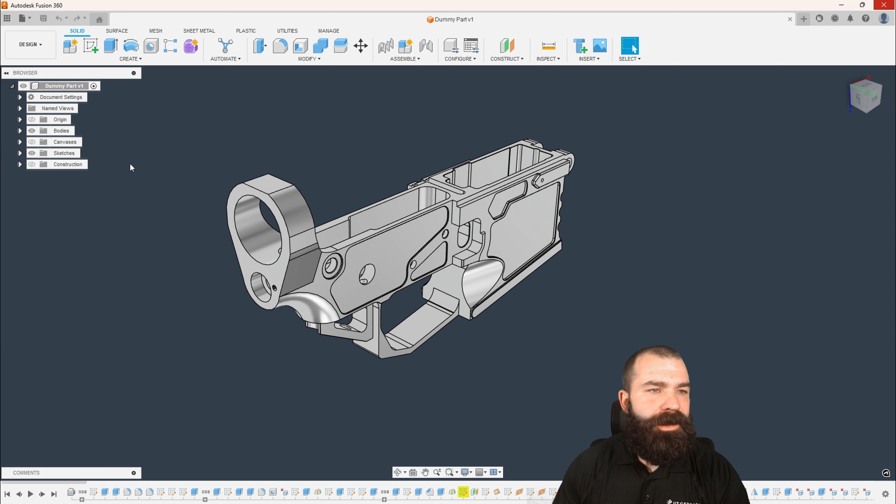The first thing I'm going to do is I'm in the design workspace. I'm going to create a new component, and this is actually going to be my fourth axis jig. The reason for that is so we can track everything under one component, making our life a little easier. Now, I am going to make this in two pieces, and the idea is we're going to run a bolt through this actual trigger area to hold it on our machine.

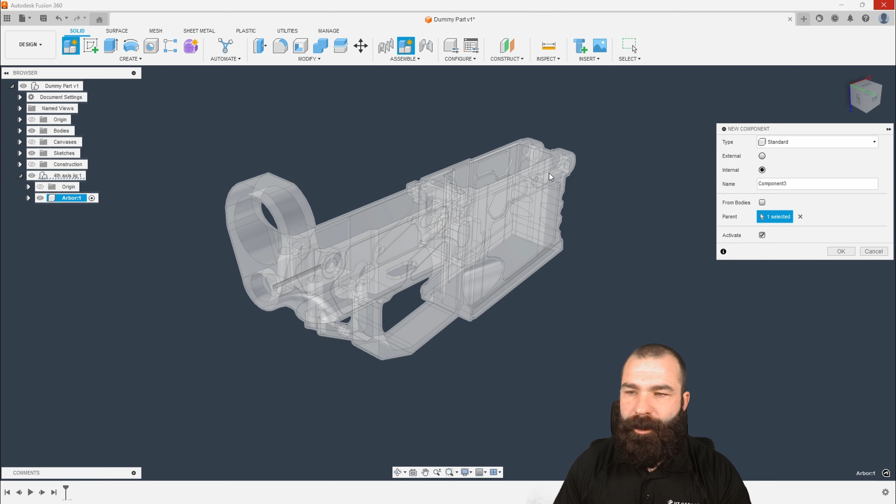So let's go ahead and create another component, again just making our design much easier. This will be the Arbor. And then what I'm going to do is create one more just to get ahead of the curve. We want to file this under the fourth axis jig, and this will just be the plate.

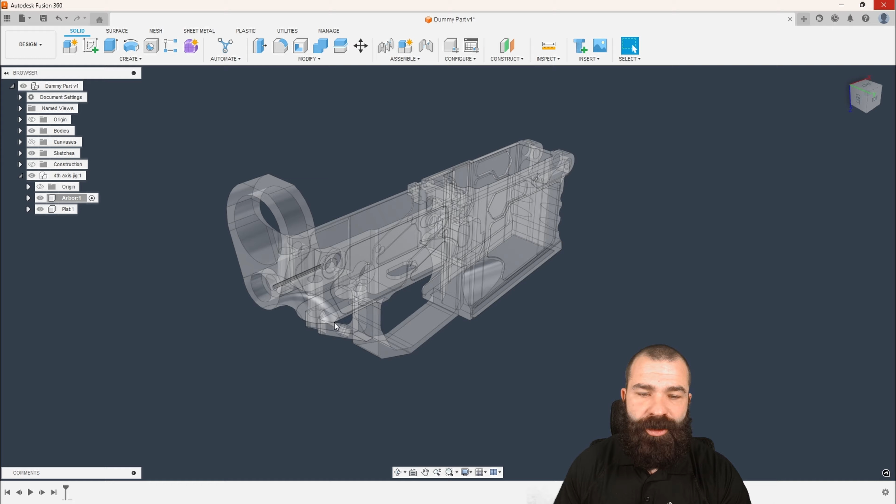Now that we've done that, I'm going to start with the Arbor. It tends to be easier in my opinion, but you need to come up with a design that's specific to what you're going to do. I'm going to do this with a couple of really nifty quick tricks, starting by sketching right here on this profile.

In my case, maybe I have some round stock that I want to work off of. So I'm going to drop just a couple of very simple circles. Now, I don't know on your fourth axis the way you plan to hold this or how you're going to fixture it. I'm going to treat it as maybe I have a Haas HA5C with a 1-inch through kind of spindle area on those 5C collets.

As you can see, I can actually do quite a bit here. So let's say, for example, my stock was actually 2 inches around - it's too small to fit, so I may want to look for something bigger. Again, we could actually do a rectangle here as well.

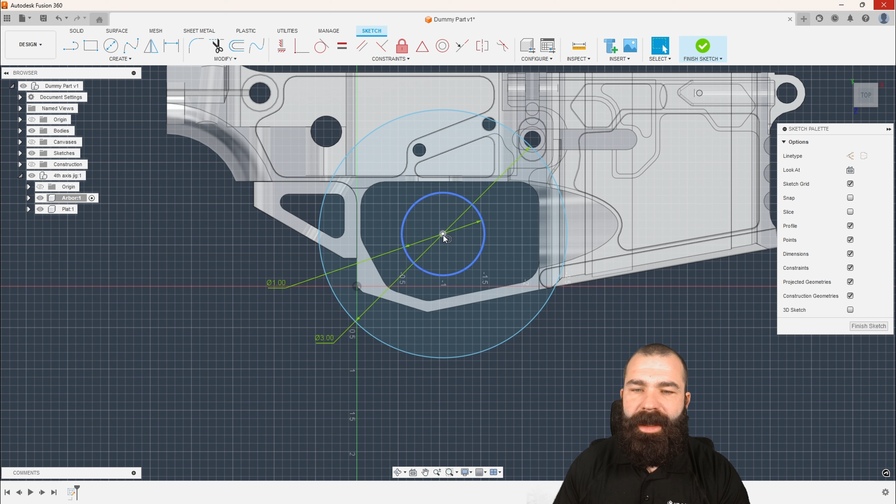The idea is I would like to get this where I can get a good hold on some of these flat areas to pinch together, but then use this profile inside the actual trigger area almost like a cog to spin my part and to keep it constantly clocked. So I'm actually pretty happy with this design that we have sketched out here.

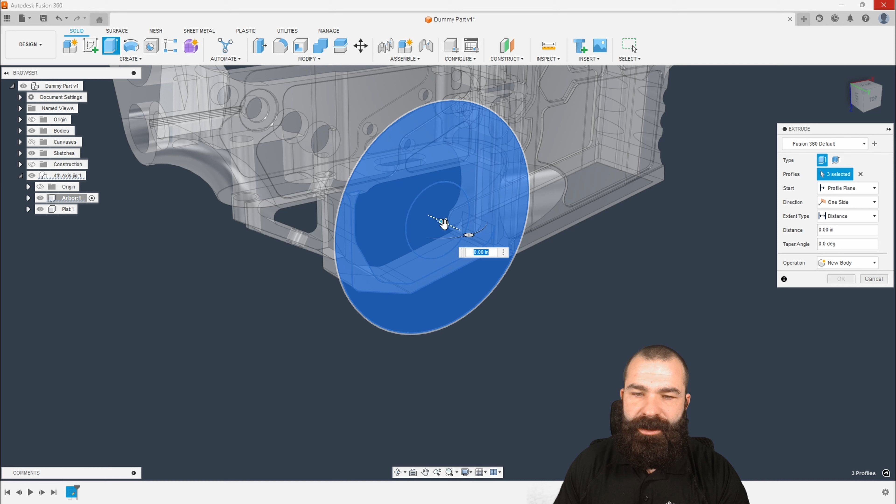So what I'm now going to do is actually extrude everything. I'm going to go ahead and bring this out maybe 375. Again, I'm going to turn that sketch back on, and the idea now is we're going to do another extrude.

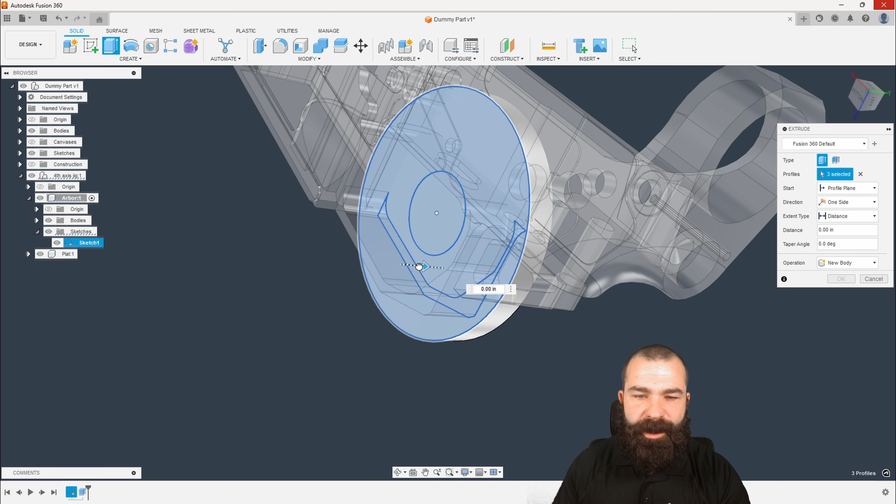This extrude on the backside is actually going to go back the other way. The idea here is we want this to actually protrude - and this is my opinion on it - I want this to protrude almost all the way to the other side. The idea behind that is so we can get as much material in that trigger well as possible for alignment purposes.

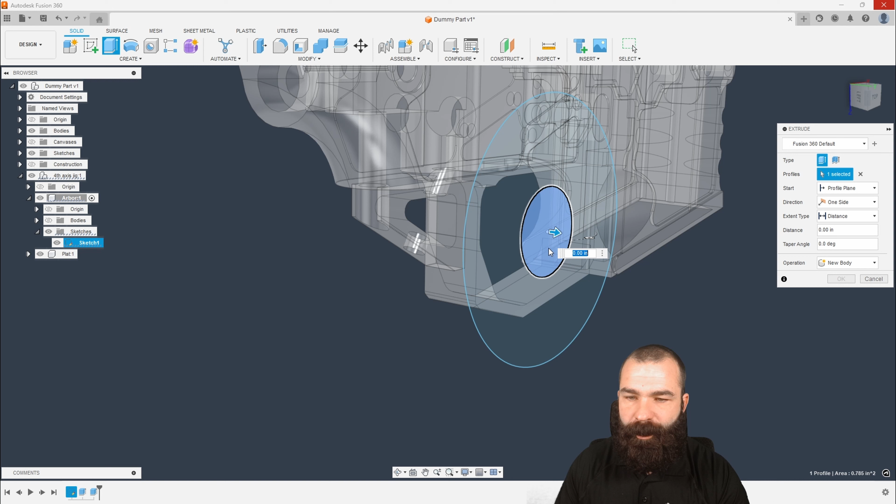Now, again, I'm going to do another extrude. This final extrude here, we're going to get that body out of the way. We're going to go ahead and extend that Arbor kind of center area. And if I turn my sketch back on and my body, we want to go ahead and join these two together.

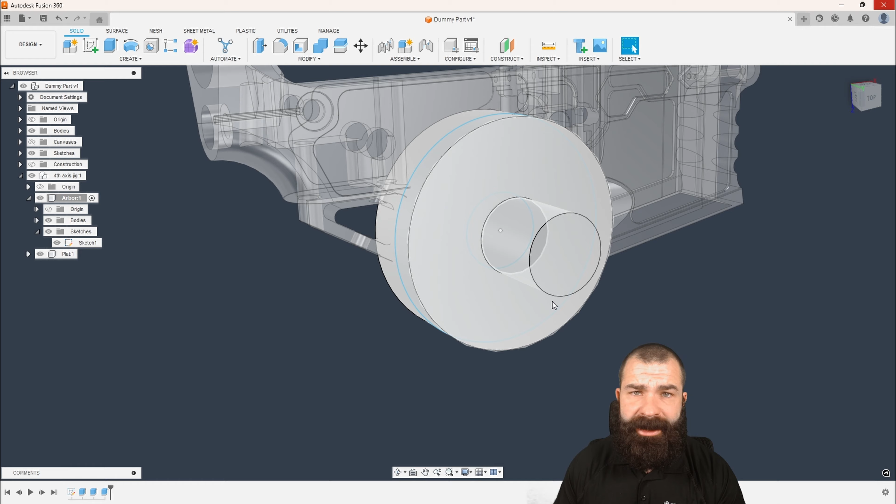So as you're seeing, these dimensions we can clean up after the fact, but all I've really done is positioned that profile I want to use. Again, I'm using a piece of round stock because it might just be something I have laying around, but I'm creating a physical body that we're going to now combine and cut away from.

So with my combine command, we're going to go ahead and target this body. My tool body is going to be actually this part here. And what we want to do is cut, and of course we want to keep the tool - this is very important.

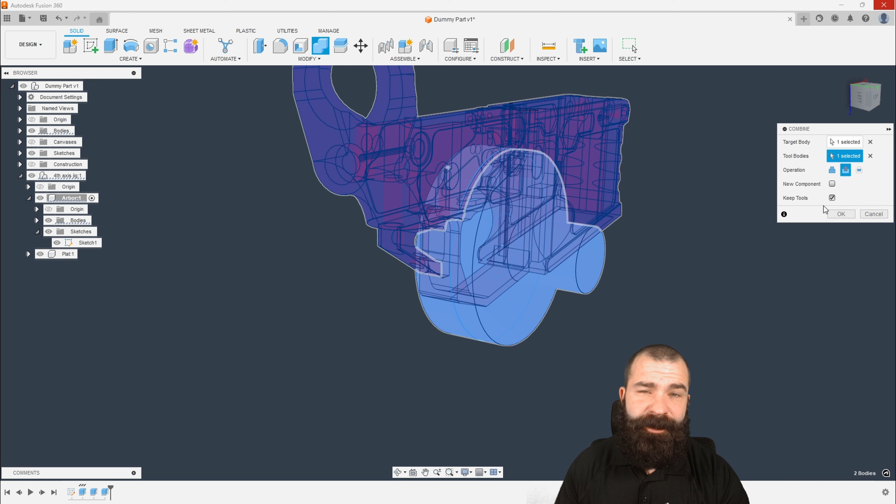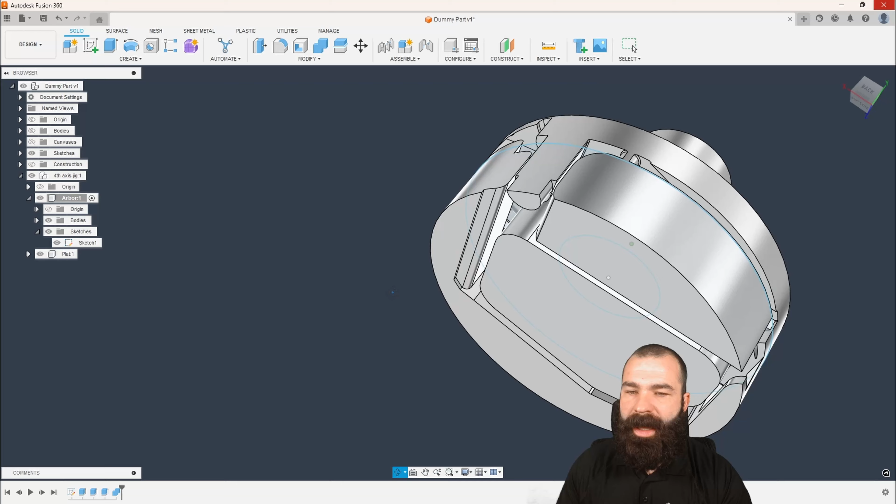So you do want to still keep the original part you guys are working on. What you're going to see happen is if I turn off my original part, I now basically have a negative profile of everything we were just working on. So the trick is we need to go through and clean this up any way possible so we can hold on to this part and make it so we can slide that part in and out.

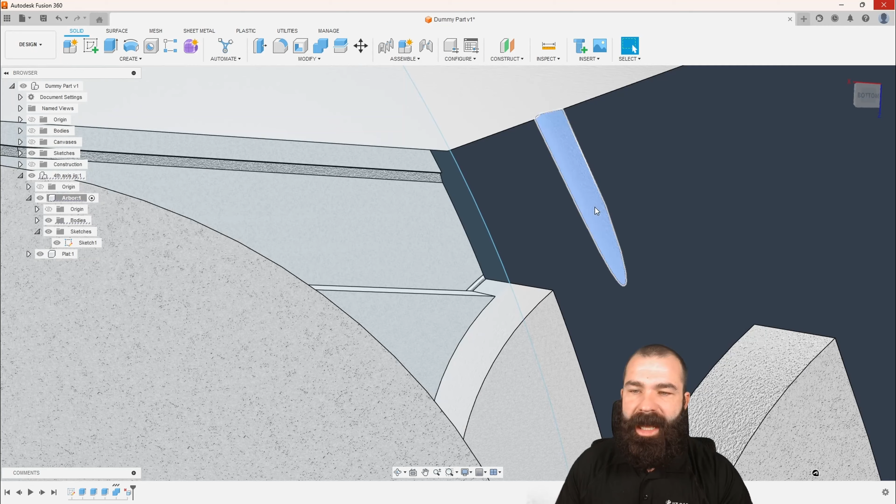The first couple of things I'm going to do at a very easy level is use the control key and grab some of these profiles here. I'm just going to use my delete key, and as you can see, I'm able to actually start to eliminate things that I may or may not want.

Now keep in mind here, guys, as you start to do this, you are going to want to turn that sketch off because it's going to get in your way. But the more you do this, you're going to get to a point where you notice you have some weird chamfers, things like that.

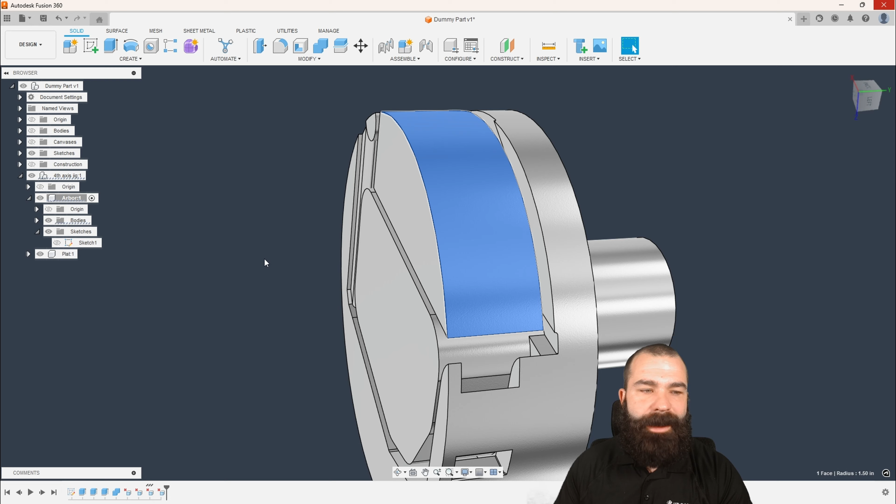But now that we've separated this, we should hypothetically have two bodies here. So again, I'm going to turn off that body to get it out of the way and continue with this process.

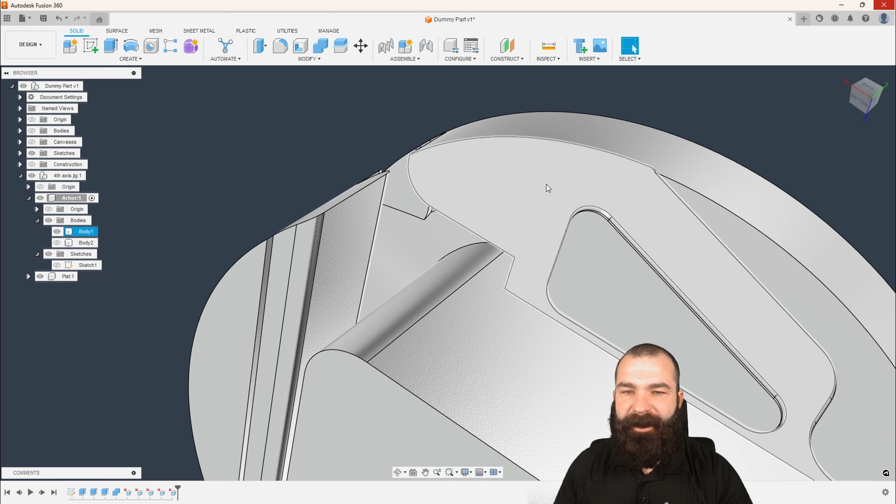A key thing for you all to remember is you want to go through and remove your fillets and chamfers first. This tends to really help the process. So if I get rid of that, see how it removed the entire feature for me, making my life much easier on this part and profile.

I'm going to go down and around here and see if we can grab all of this in one shot. Sometimes you can, sometimes you can't - you may have to select more or less. But let's go ahead and get positioned here.

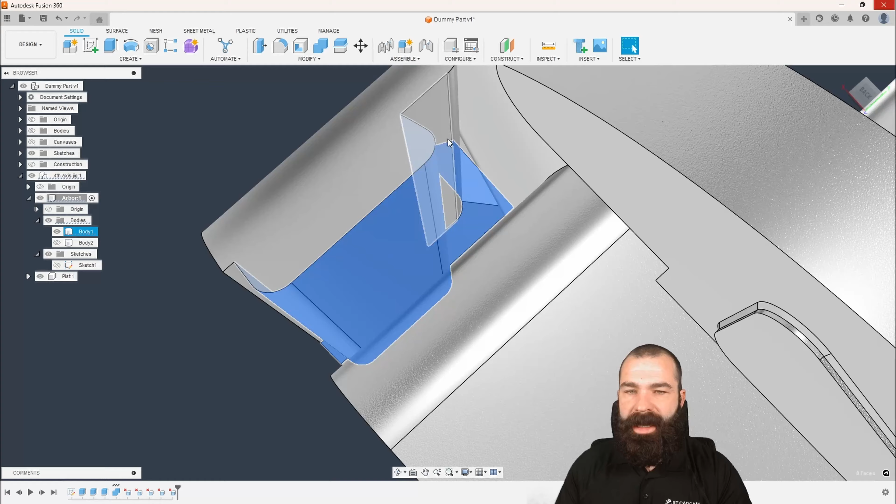I'm going to go ahead and hit my delete key, and as you can see, I can basically remove anything and everything with that delete key very quick and easy with a couple of face selections. We just start to rinse and repeat everything we're doing here.

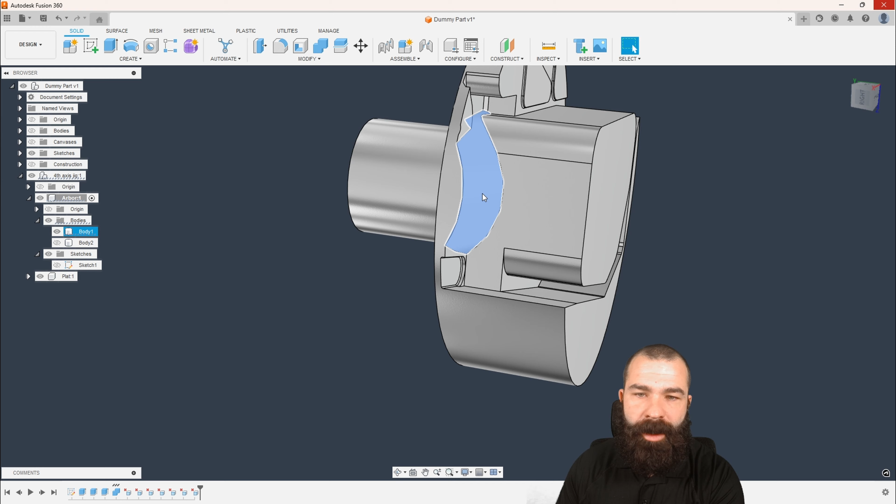So this feature right here, I may not want that on my actual Arbor. So again, as I selected and deleted, you're noticing it's starting to actually remove more and more. But if I turn on my original body, this is where we can see where we're holding on, where we're sitting flat.

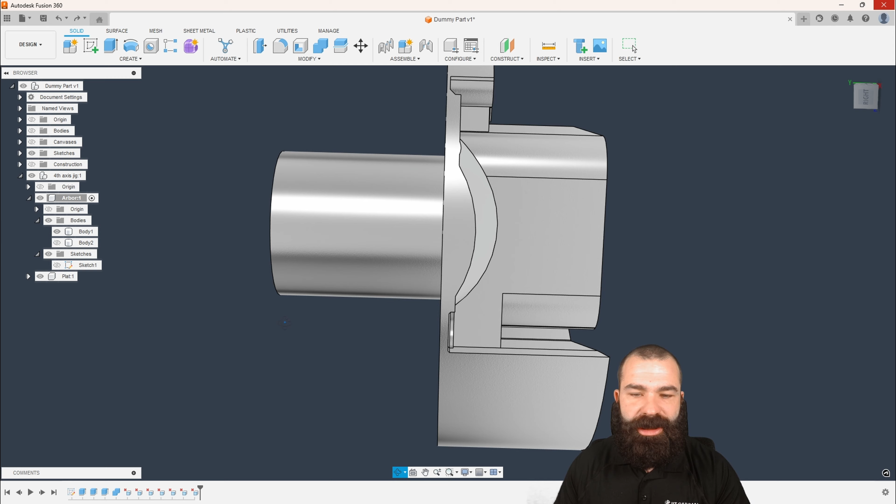So maybe that was being removed way too much. If I'm trying to sit flat against this surface, we could actually use Control Z to back that up a little bit. This is just something you guys are going to have to do time and time again inside the software.

So if I'm looking to sit flat there, I may want to remove just this piece - notice how that opened all of that up. I don't want anything down here on the bottom, so I can go through and select that and hit delete also.

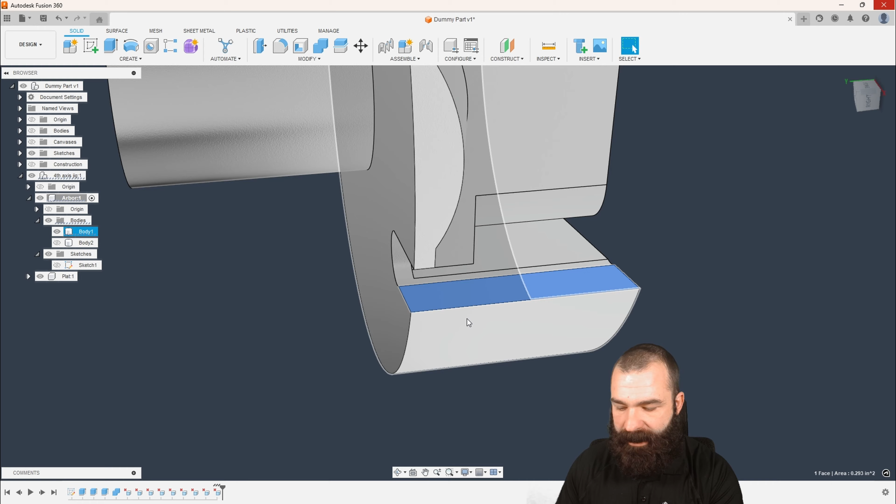And there you're starting to see that error where we can only achieve so much with what we're trying to do. We'll come back to this in a moment and fix that some more. But I'm just going to continue with the idea of opening up and getting anything and everything out of the way if I can.

So as you're seeing me struggle here with my scroll wheel, this is a good time to have a space mouse if you have one, or a 3Dconnexion mouse.

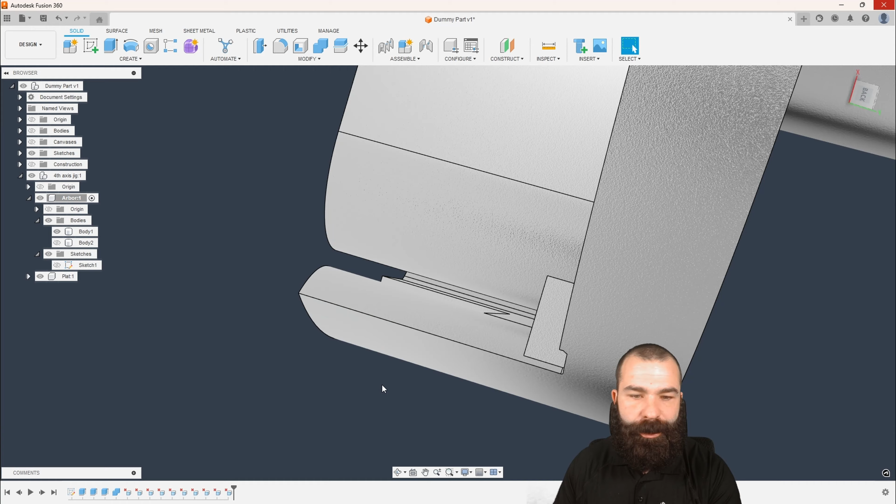Based on our deletion there, notice how that whole piece actually combined - it didn't remove it, well it did remove it, it actually filled it in. So I'm going to have to go through, select a couple of faces, and hit delete. I'm going to keep working through this little by little to get stuff out of the way.

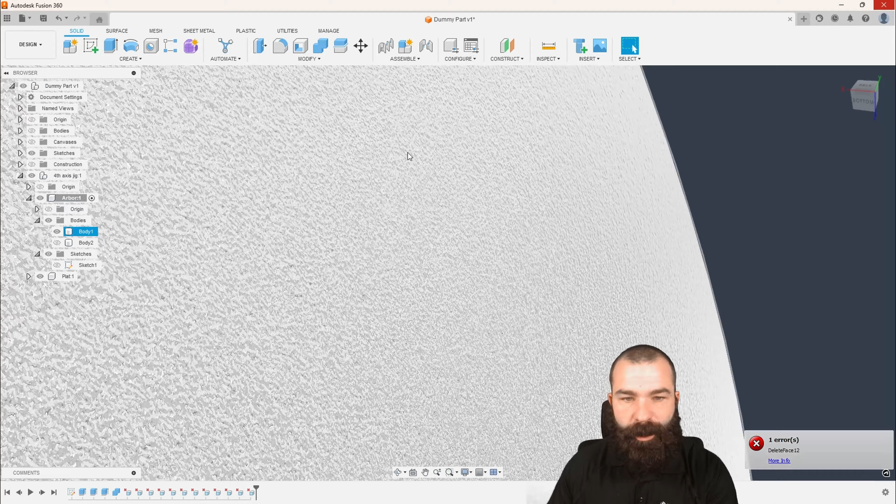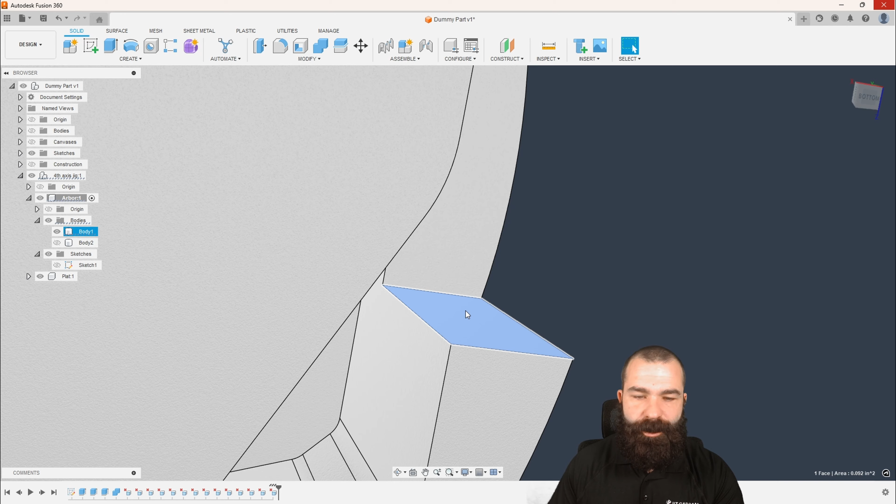Looks like we do have a little bit of a weird feature that came through here. From that, you'll notice it's not really difficult to clean this all up and get it to a point where you could use it as that jig for what you want to use. As you're seeing me do, I'm approaching this a couple of times where maybe I remove smaller features, or I have to remove stuff one at a time to get it out of the way. But once I get it back to a profile that I may or may not want, I can just highlight faces and hit delete.

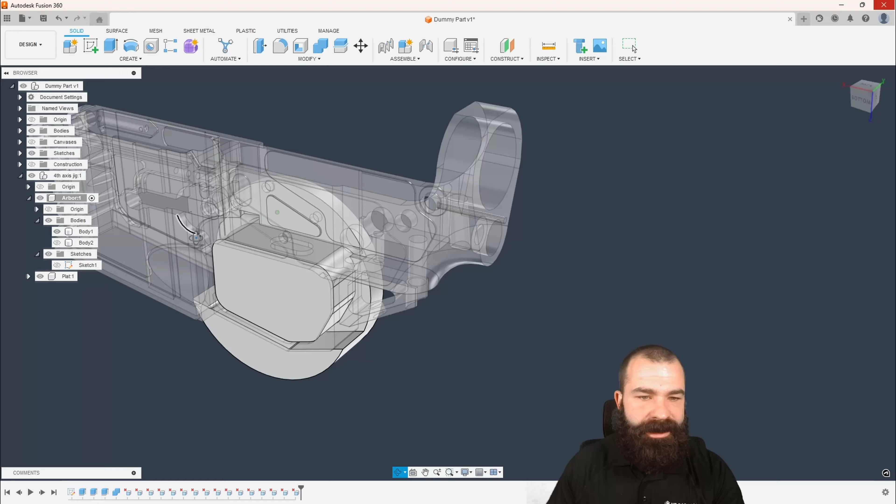I'm actually starting to like this more and more. We can turn on our original body. As you're seeing, it is now sitting in there very well. We are still making tons of contact in the flats. Down here at the bottom, this would be up to you, but I'm actually going to remove this bottom area, knowing I have to get in and machine stuff here.

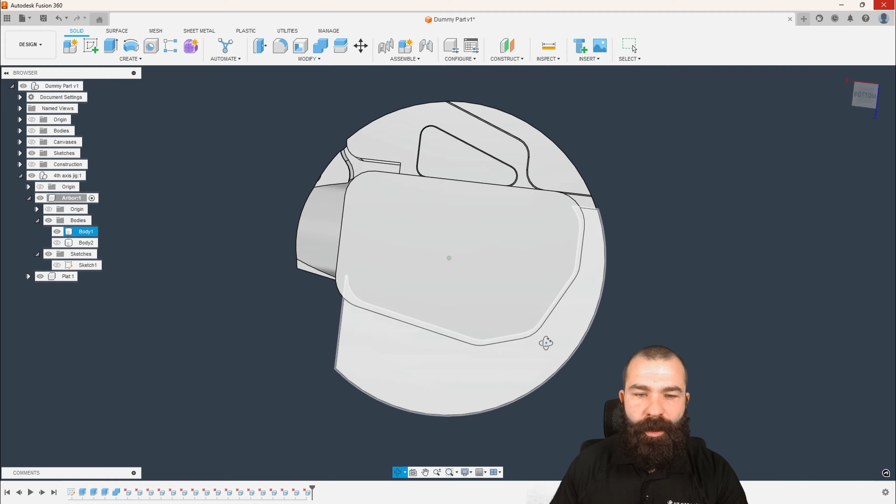So let's go ahead and move back over to that. Grabbing basically this whole lower profile, we might get lucky hitting that delete key. And just like that, that whole lower profile is gone once again. We do have to always pay attention here because we want to make sure that we're not actually still making contact. We could do another combine here in a minute to check. But as you do this more and more, you're going to find all the little tips and tricks on what you can and cannot remove with delete.

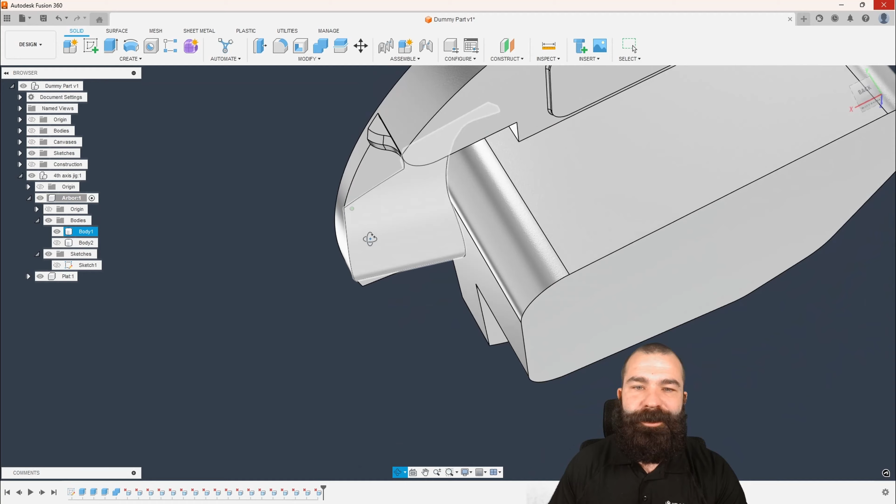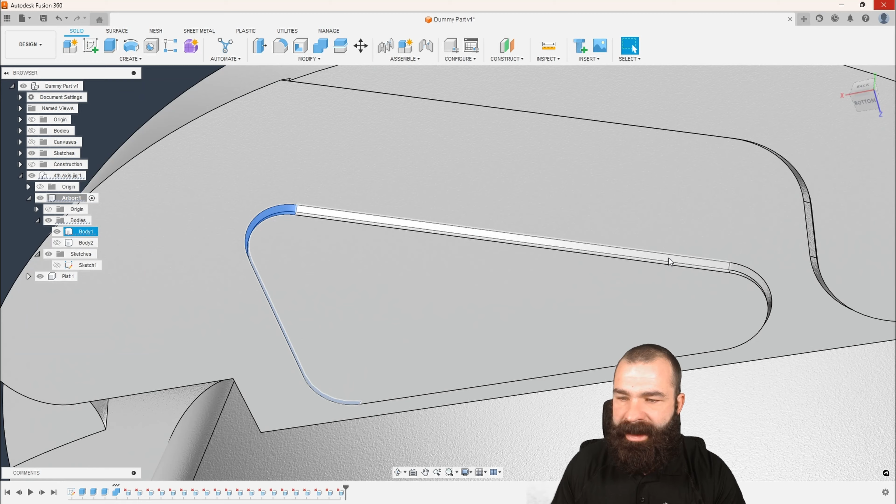Again, based off our design, we don't need a chamfer down in here. That could actually stay very square. That's just being able to fast come in, use the delete key to remove anything and everything you don't want. As you're seeing me do here, I'm going to go ahead and remove this island because we don't need the actual island to mate up to our actual physical part. I'm just holding control, using my delete key to get it out of the way.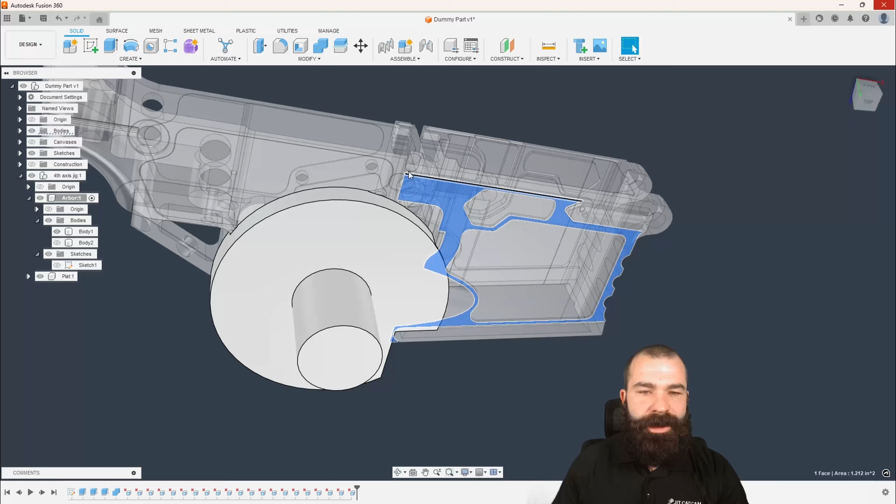Toggle back on my part. As you're seeing that little cutout there, we're actually going to be sitting mainly flat against a couple of these faces. So it looks like we're going to be holding on to this face and this face for the most part, and those are the main elements I'm using to actually sandwich against on this profile. So we have that inside trigger area to create our clocking off of, but then we also have this outside flat area that we're pinching against. You can add as much or as little as you want to this.

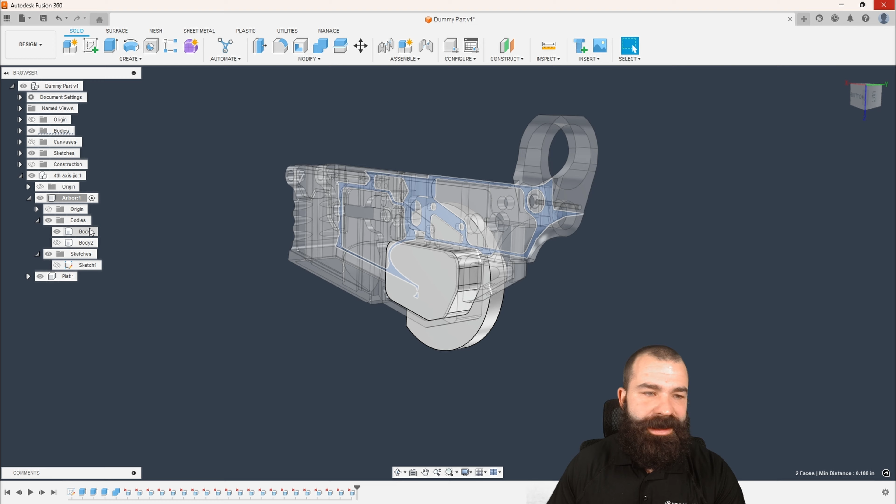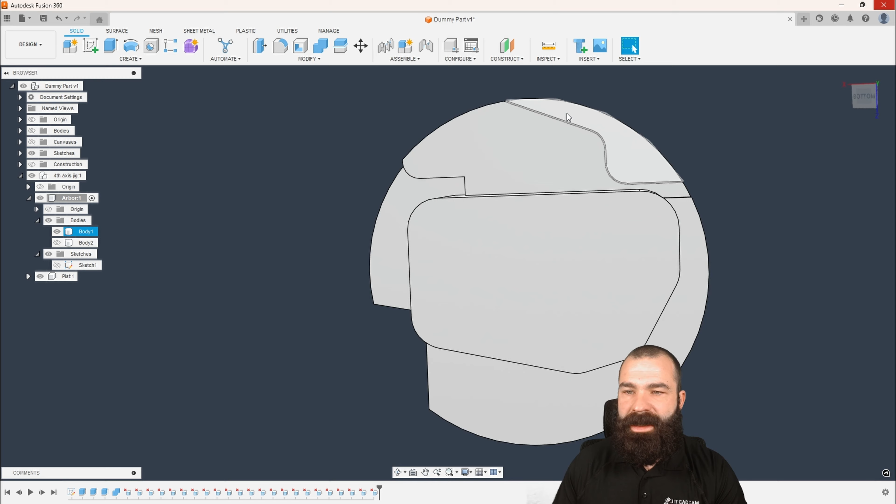So if you guys wanted to, you could actually just eliminate this whole top area if you want. We're going to go ahead and attempt to get rid of that half round there. As you can see, that came out no problem. Just picking these profiles and using my delete key goes a super far way when it comes to any of this stuff. So as I know I don't need anything here, I'm going to grab all these edges. You're going to see me do this one in two parts: I'm going to remove the lower fillet first, and then I can go back and remove the actual island that's sticking up.

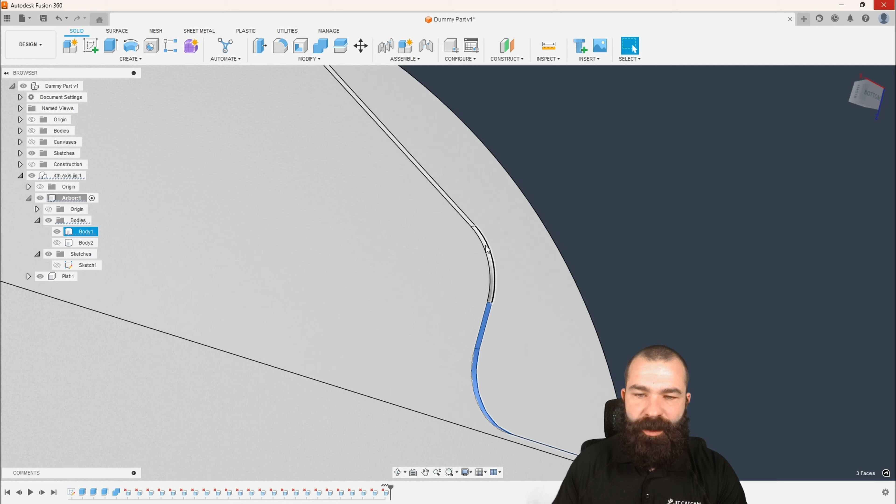So once you kind of proof out everything you want, you get it to your design. I'm going to go ahead and stop here because I don't want to bore you guys to death with just me deleting features. The concept is that we now have our arbor.

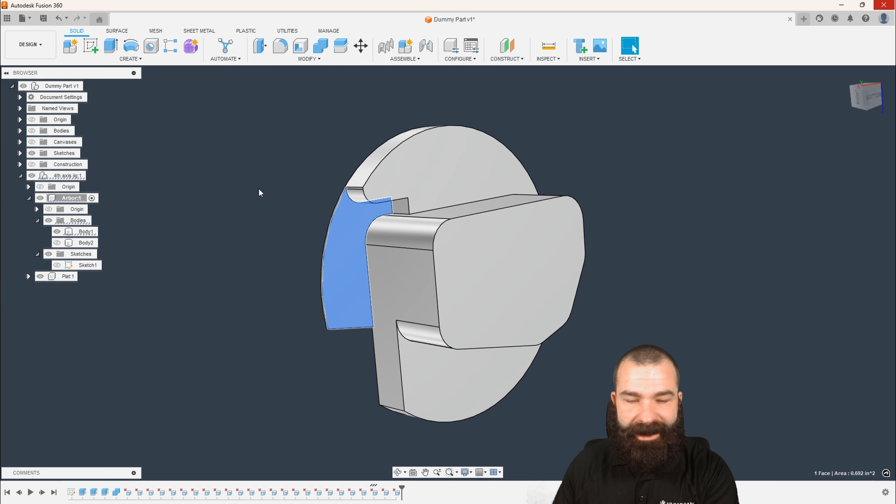Again, because of the way Fusion works in extruding, you can see we have some very thin material here that you may or may not want to keep. Up to you guys, as always. You could go ahead and just select that and delete it. You could actually go in and change our extrude dimensions, or we could even extrude off of this just as is to give that a little bit more thickness if you needed it.

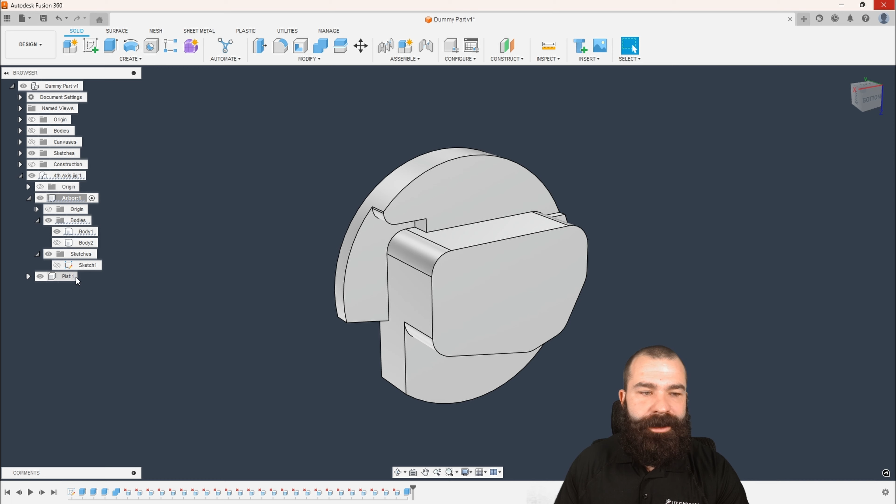But now that we have this, I do like this quite a bit. This is a very simple design. We can utilize this design now. We are going to actually create now the mating part, which is going to be the end plate on this design. That plate is now active.

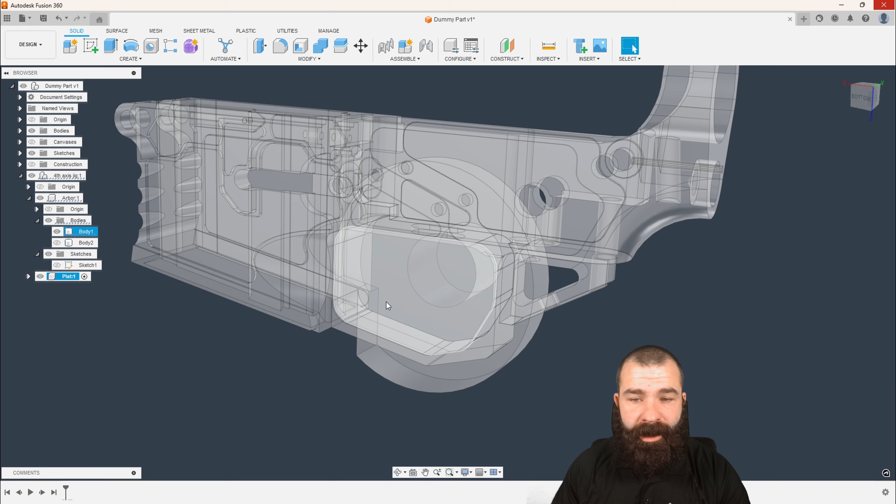So again, anything we do based on the plate, the mating plate, basically, we want to make sure that we have that active. Again, I'm going to go ahead and turn on our main part. As you can see here, here's my main part once again. If you guys wanted to, again, this is 100% up to you, we could reuse kind of the circle that we created from the other side.

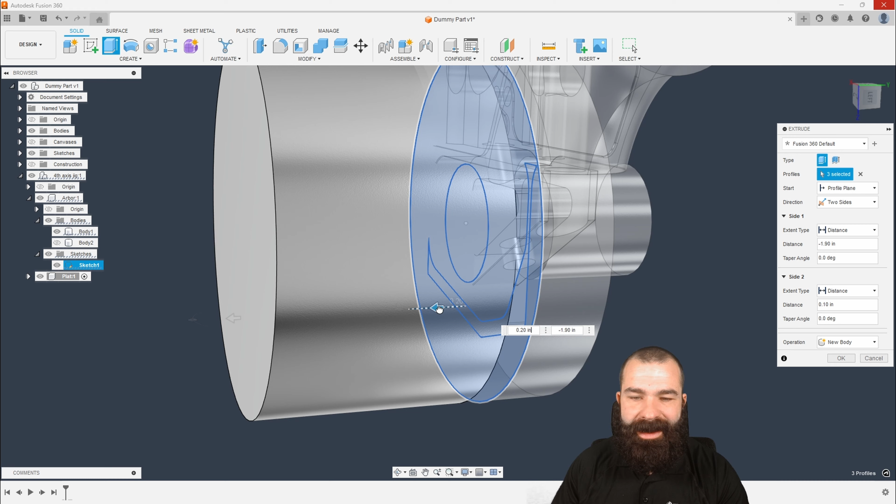This would be a good time to be able to do a two-sided extrude. So if I wanted to, I could say two-side extrude. Again, I'm going to just grab all of these profiles. And what I'm going to do is I'm going to pull this guy out. And it looks like I didn't pick two-sided. But as you're seeing here, I can now set this to anywhere and everywhere that I want.

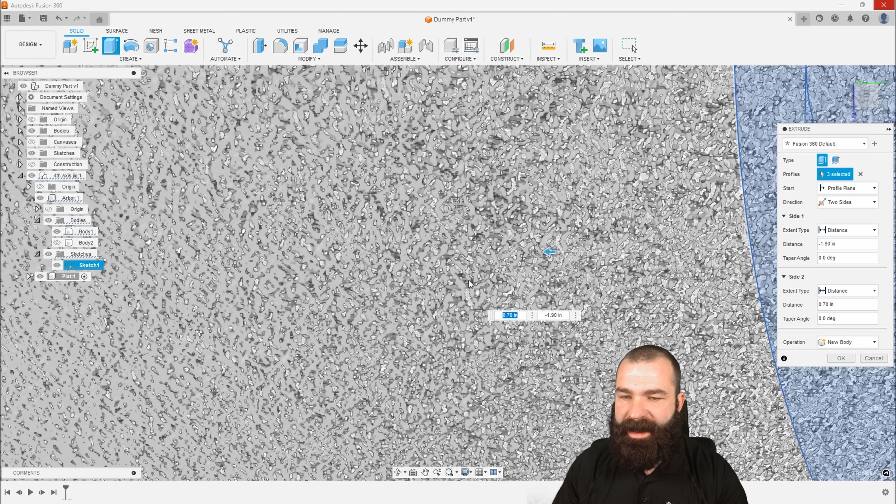So again, the idea is we need just enough to meet up against our flat here. So if I actually click that arrow and then I come in, I could actually pick the face, or I could say extrude to. Now, I want to add a little bit of a gap here. So as you can see, I'm going to go ahead and plus in an additional .05 maybe, or that might be way too much where we're not mating down flat on this side. So again, what you guys are going to do is going to be based off your design.

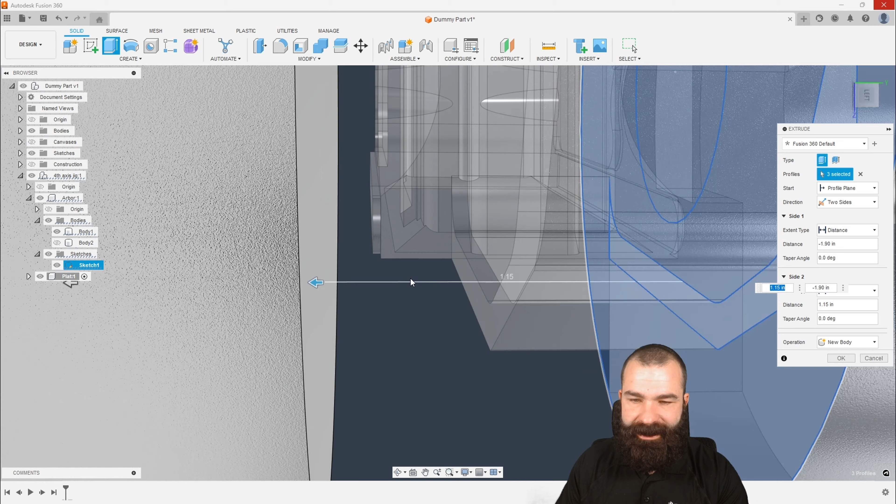As you can see, I actually screwed that up where I picked that surface. I'm going to go ahead and pull this out further and tilt us a little bit here. I want to go off the flat of my arbor, not the trigger housing. And now I can go in and I can say, you know, plus .05. And as you can see, we now have that gap between the two. Oh, we went ahead and said shift equal signs. But now we have that gap between our arbor and where that actual piece is sitting.

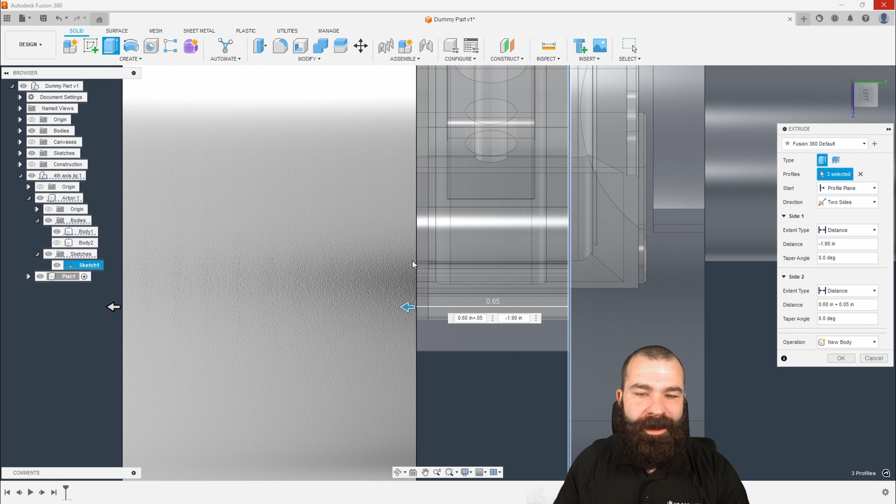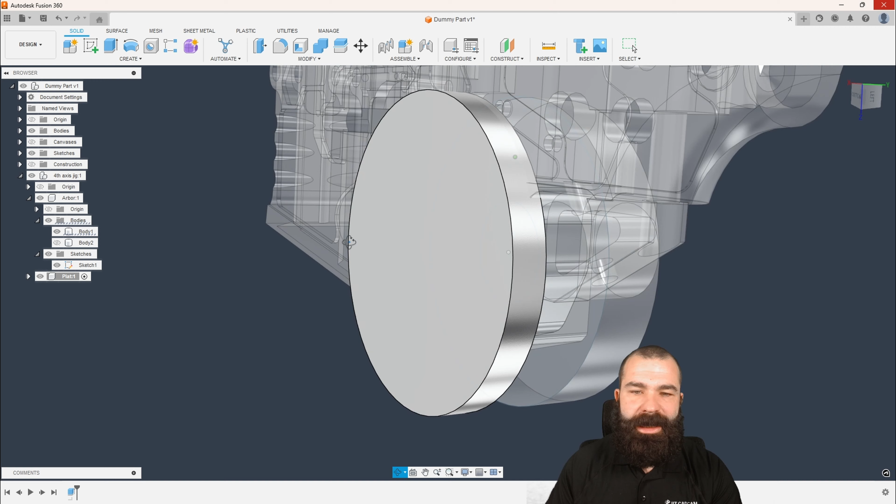Again, this is all 100% up to you. My personal opinion would be I would actually set this guy straight to the lowest flat. It'll make my life much easier. So now that we have that, we could just kind of rinse and repeat. I'm actually going to go back and not extrude that out as if it's a monstrous thick piece, but we could do our combine. Again, just walking you guys through this process.

We could combine this guy with this guy. Again, this is a cut. We want to keep that tool. And then let's go ahead and isolate this guy so we can work on it. So what's going to happen is you're going to see that I can right click and I can go to isolate. And now I can work on this model without interference from anything else.

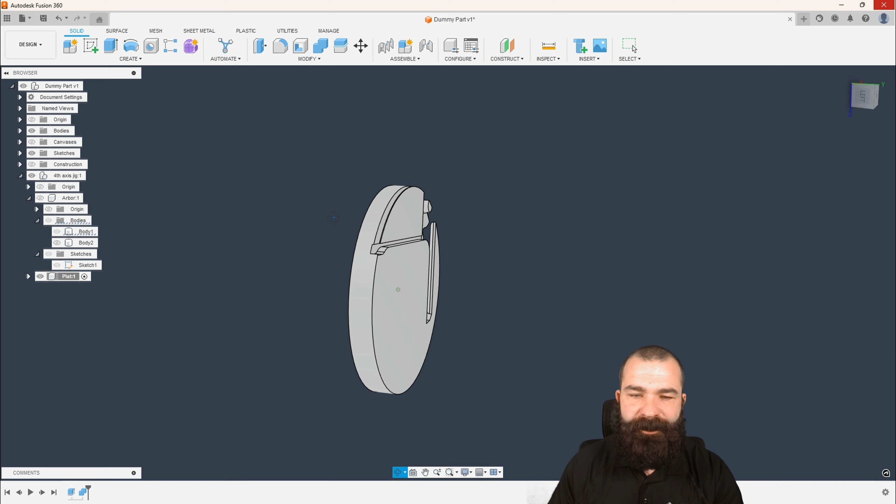So again, just going right through what we just did, we're going to go ahead and remove some of these features. As you're going to see, that now is going to possibly give us a whole other body here that I could just delete out of the way. And I'm just picking those parts and areas one at a time and hitting the delete key. So again, just using your control and your delete key, we could walk through this.

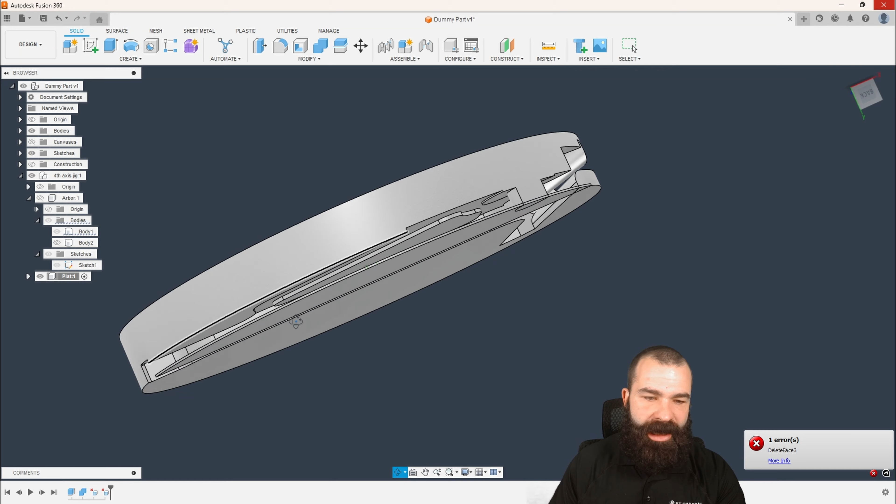In this case, we're actually getting a little interference on that part. And again, this is where you guys just have to walk through and delete things one at a time. So again, I'm going to back this up a little bit, and I'm going to start by deleting this guy if I can. And now notice by deleting that first, it now allows me to change how I'm deleting out other areas. So again, each scenario is a little different.

How you select those faces will make all the difference as well. If you are working with something that could be considered perfectly flat, or as I like to always check, make sure that it's not just a second body. In this case, it is.

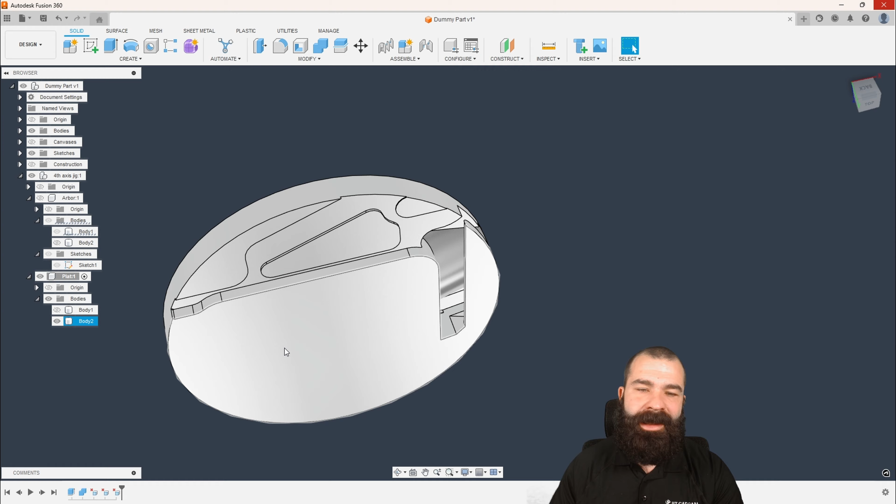You can't delete a body completely technically, and that's why we're getting that interference. But same thing applies, right? So I know I don't care about any of these little islands in here. Knowing that this part is actually relatively flat, you guys could also do things like press pulls and extrudes. So if I grab these islands and pick that flat face, again, you can notice that I can get rid of those islands just with a simple extrude.

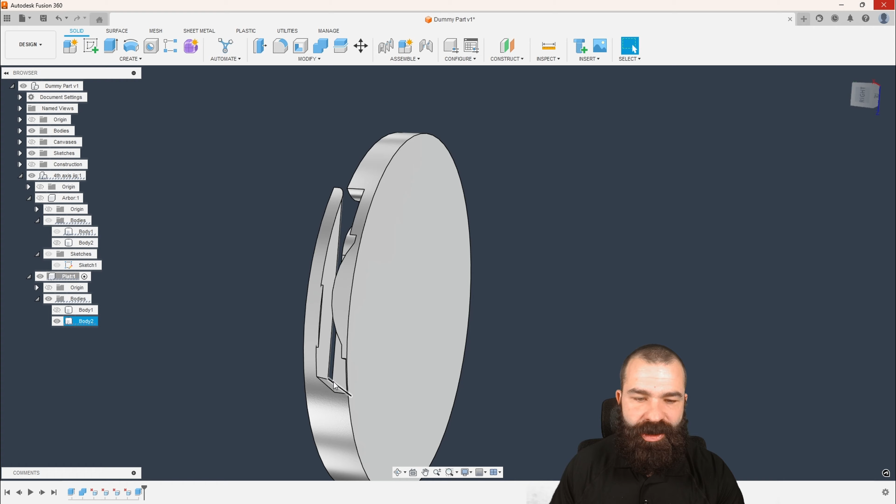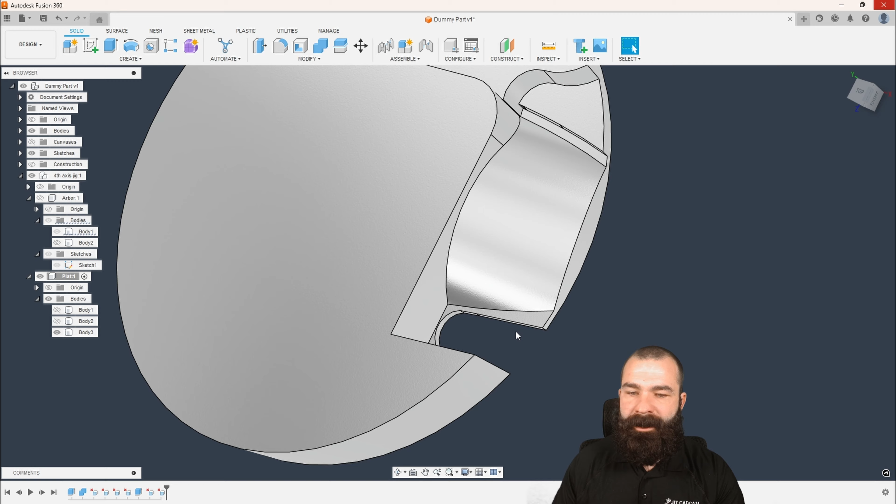So again, coming down and around here, I'm going to go ahead and select all these couple of faces here. Same thing, using my delete key, for the most part, just wiping things out as much or as little as I can to get rid of it. And sometimes, again, you create a whole extra body that's not going to be needed. So from here, as always, we can go ahead and just remove, right? That's our game plan as of right now.

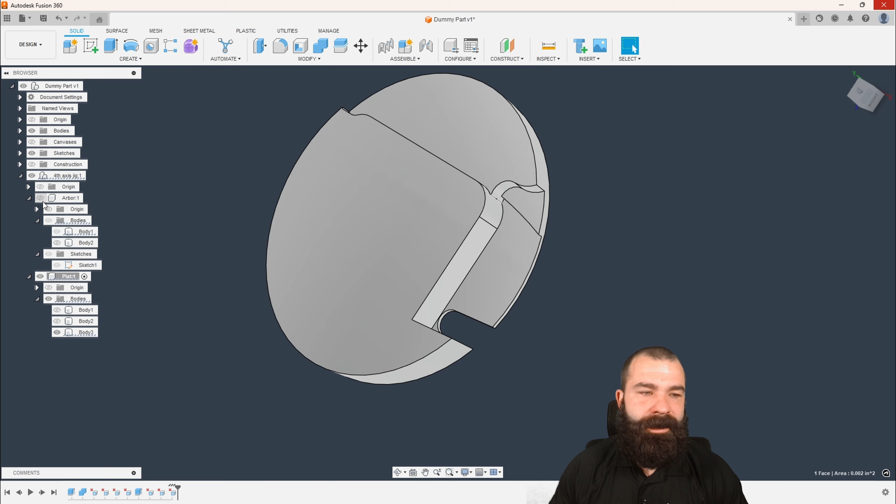We also don't want anything that could interfere with our part and how it's going to align. If there's maybe an overlap or a step, we can fix all that stuff. So now for the fun stuff. What I'm actually going to do is turn on my Arbor and my actual plate that we're going to use to mount this. Again, you guys are going to clean this model up a lot. We could create sketches all day long, extrude rectangles, things like that. But let's go ahead and actually add in our hardware.

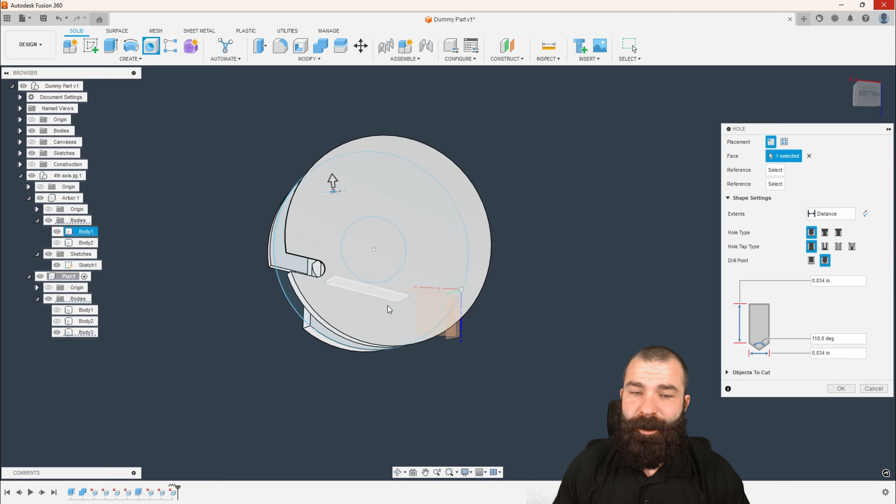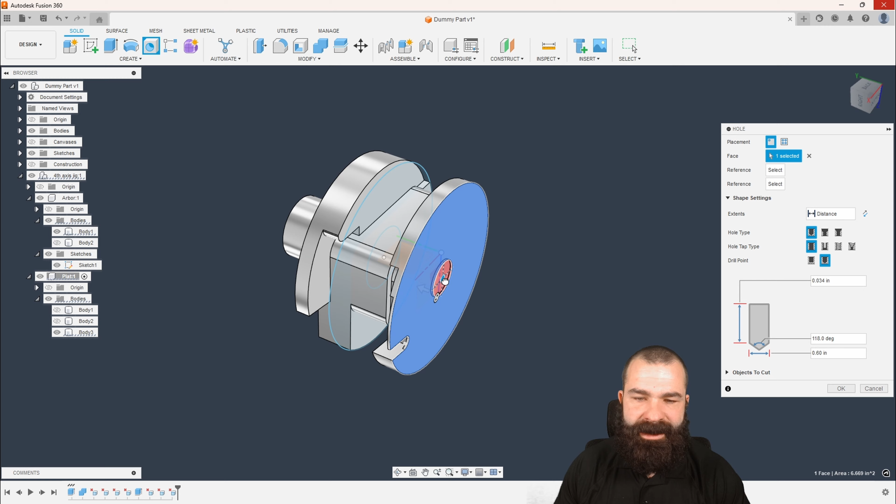So I'm going to come into Create and we're going to add a hole. And this is why I like the idea of a round face to work with: we're going to place that right on the surface that we want to work with. So as you're seeing here, we have this body here. I'm going to pick that surface to work on. So right here, I'm going to move this to center. And this is the key element: because we're working with that round face, it's automatically going to give me center of that face.

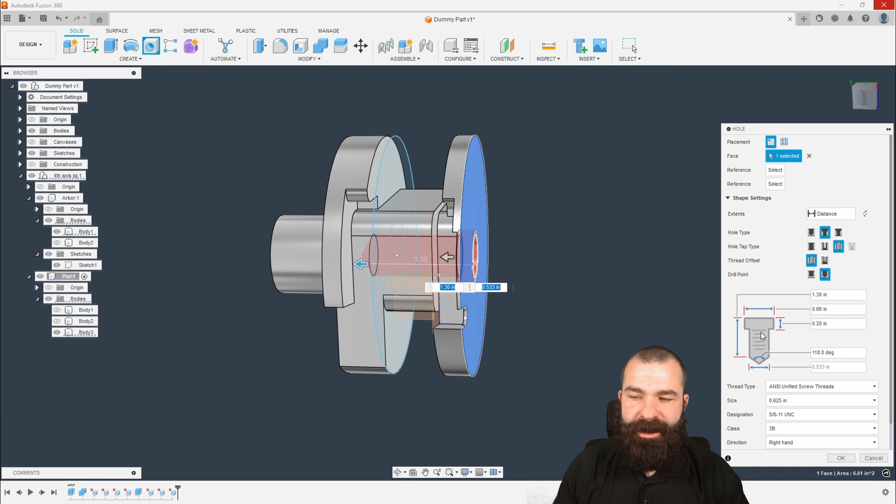Now, I just have to plug in my profile and my information. So this is going to be a counterbore. This is going to be for a clearance, possibly a flat bottom, things like that. So now we could actually set the dimensions of this hole for what we're doing. We could actually go tapped here as well, and you're going to have your upper shoulder versus your threaded area, things like that. But the concept is still the same. What we want to do is create the profile that we plan to drill and bore out to bolt our two pieces together.

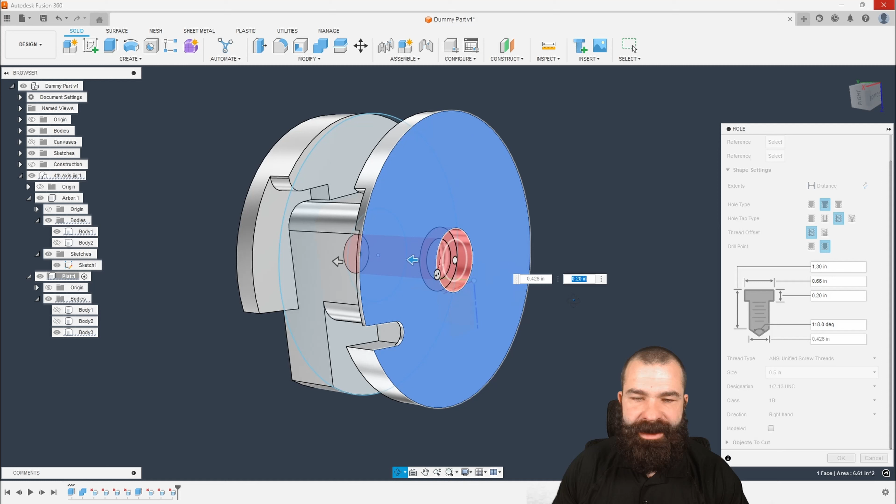So if I go through here, I'm a big fan of half-13s if we can get away with it. So we're going to go half-13. As you're seeing here, we have all that information set up inside of Fusion 360. So now we can actually build this as we're going to more or less machine it. So this is kind of a quick way to add that feature in.

Fusion does now, so you guys know, let you go up here to the top and insert a fastener. This is a super cool thing, especially with your jig and fixture design. We can go ahead and search. We just need a bolt. Maybe we want not a hex head. Let's go back real quick. We're going to go for a socket head, shouldered maybe, yada, yada, yada. Yes, no, maybe so. Everything and anything.

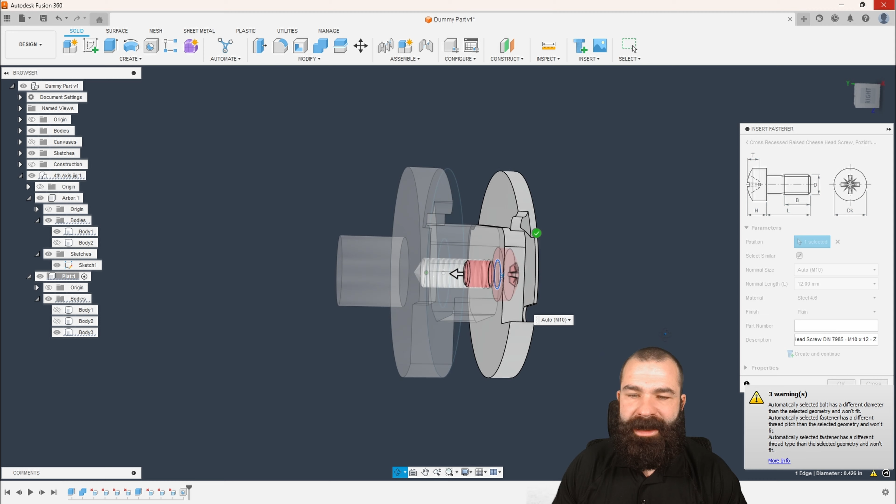It's going to be up to you guys what you want, and we could actually place that right here in real time. These specs don't line up; I'm just showing you a neat way to bring this stuff in and utilize it on your part. So now that we've designed our jig, we have our original part as well up here, and I am going to just turn everything on and get our sketch out of the way.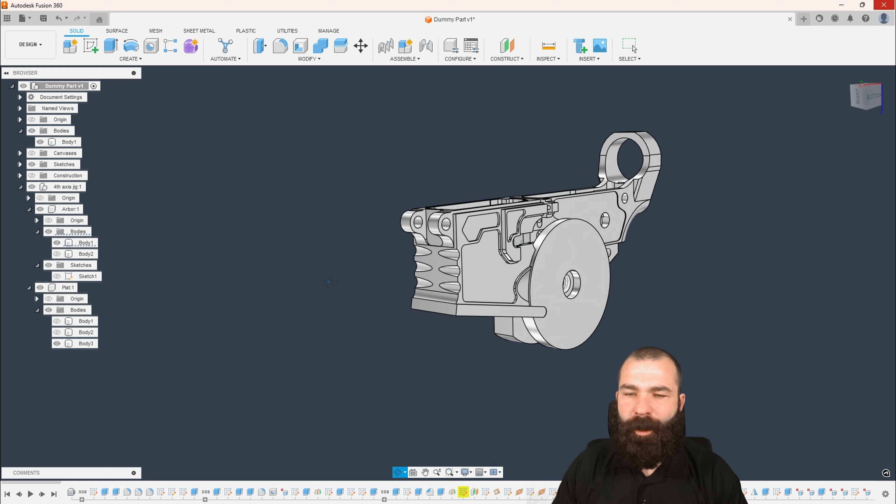You can now see how we could use this to our advantage to actually machine this part. So now that we know everything is going to rotate around center, what does the machining side of this look like? So let's say, for example, I want to do some stuff on this buffer tube. I'm going to go in and create my setup. As always, we do need to set our Z and our X.

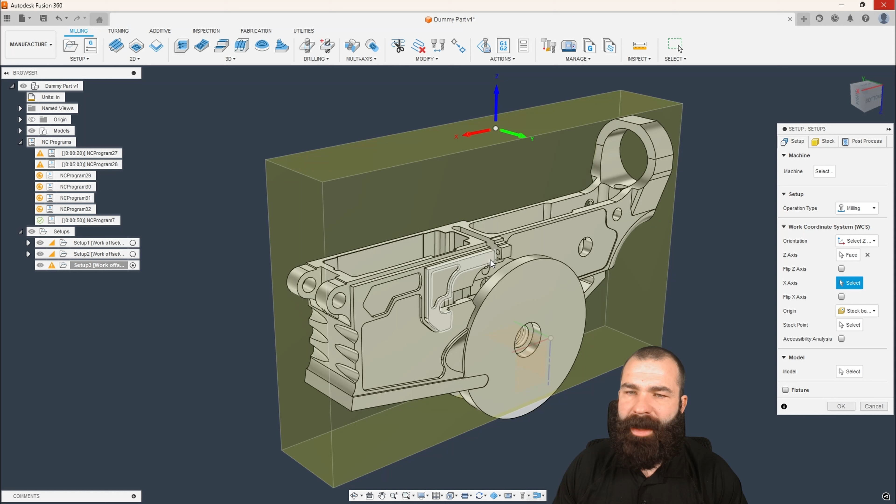And if we're using a fourth axis, our Z is probably going to be up off the flattest area, so you can dial indicate that in initially. And then my X axis is going to point towards my fourth. I actually did mine a little bit backwards here, so we're going to go ahead and spin it this way. So if you think about the machine, and we might add in a fourth axis machine here, it's going to hold on to directly center of that arbor.

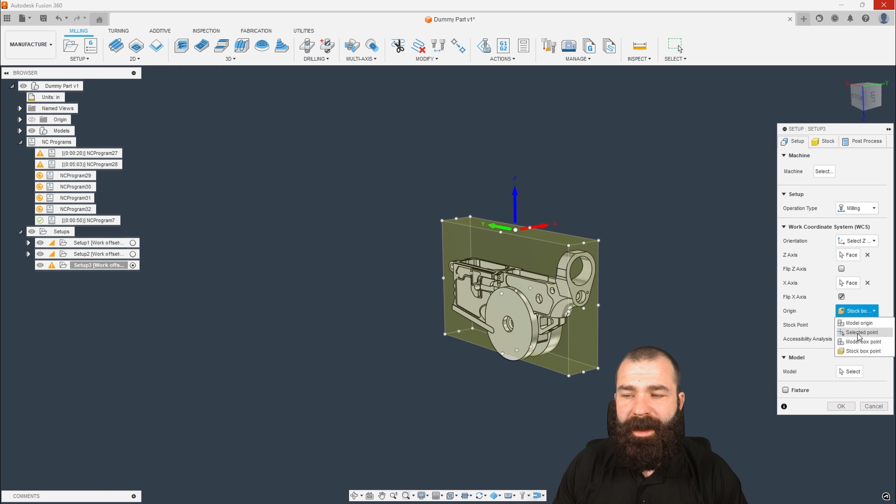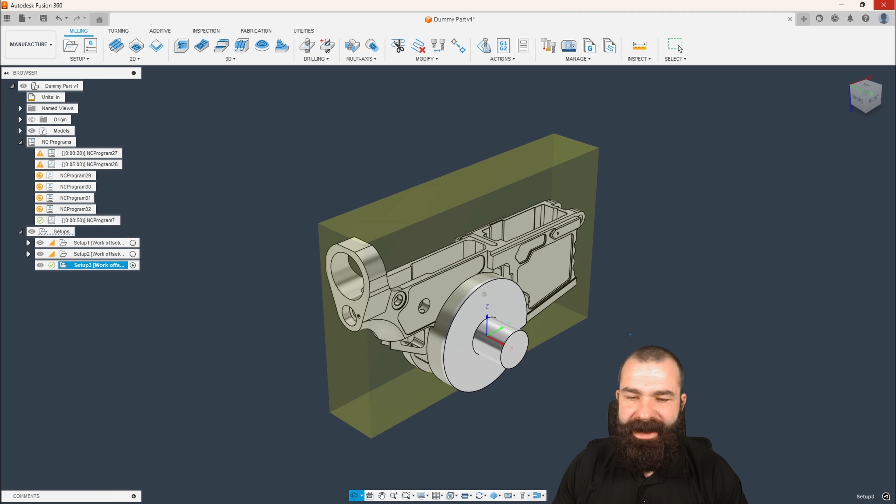Now, my location where I am going to set everything from, this is up to you. I'm going to use a selected point, and that selected point, in my case, I like using this big flat here where I could probe or edge find off of, and then center of my actual rotation. So from that, we have that all set up here, and I do need to select the model, so let's go ahead and give this a model here. You're going to notice that my XYZ is now down and around center, rotating around center.

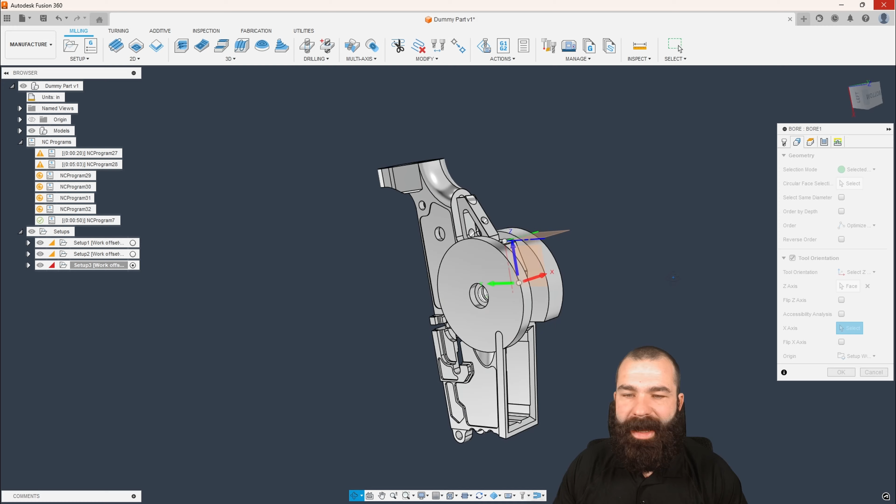So if I want to go in and do something like a 2D bore operation with a flat end mill here, hopefully we should have a 1/2 inch flat in here somewhere. Now, using my tool orientation, I know X always points towards that cylinder, so I need to set my Z now, and now my Z is set. So we're going to select that bore. And as you're going to see, with obviously a ton of other adjustments, I've just created that fourth axis rotation using that kind of arbor to hold my part. And that's going to be a rinse and repeat from here.

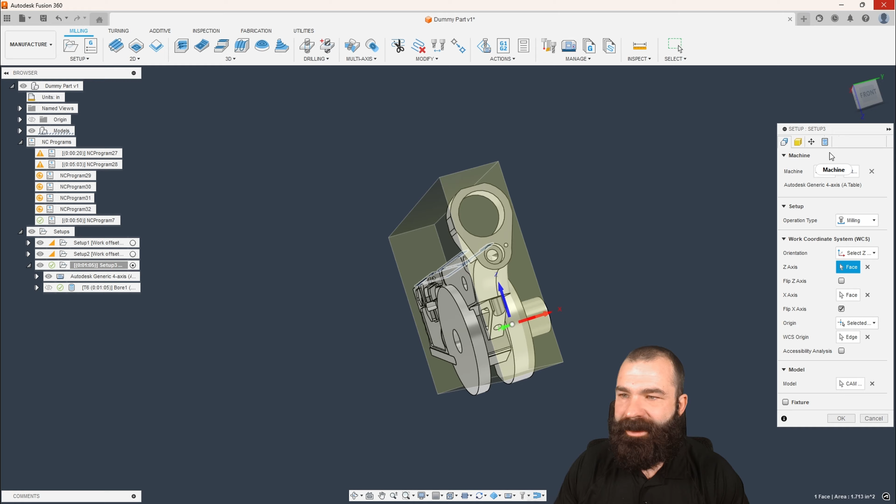So let's go back now and throw this on an actual machine. I'm going to go ahead and select my machine. We have quite a few different machines out here, so we're going to select this guy here. It's going to prompt me to download my model. Maybe I can get lucky. Do I have something local that doesn't require downloading? I do. Perfect. So again, as we're going to place our part on our rotary, I know this rotary isn't necessarily the Haas HA5C, that's understandable, but we're going to say selected point to selected point.

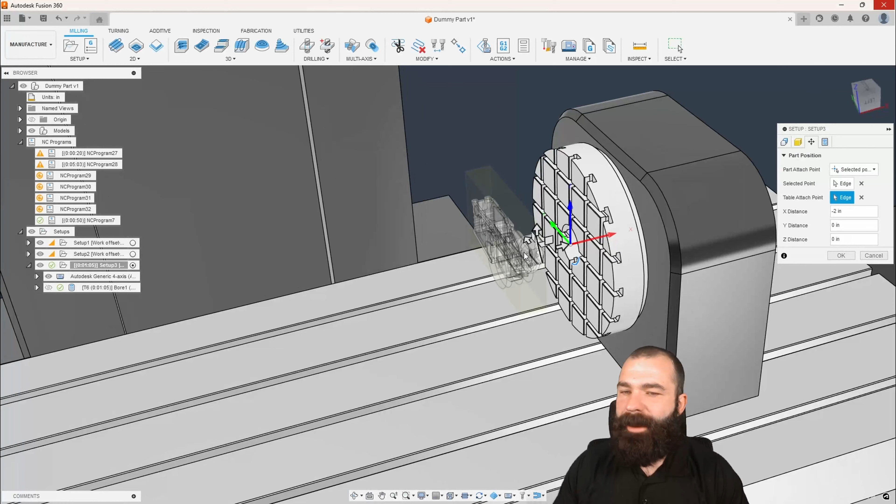So what I want to do is define the center of rotation of my part. I want to go ahead and define the center of rotation of my arbor and where that's going to sit. I'm going to pull mine a ways away so you guys can see this in real time. We're going to let this load in upside down. As you can see, it could be a little frustrating. But from here, if we go into our machine simulation now, what you're going to notice is we've now tilted that actual part vertical, and we can machine that out.

So again, with the modeling side of Fusion, it's very easy to create your own custom jigs and fixtures or arbors to hold on to awkward parts, to be able to clock them and be able to reduce the number of setups or the number of vices you're going to need on your table.